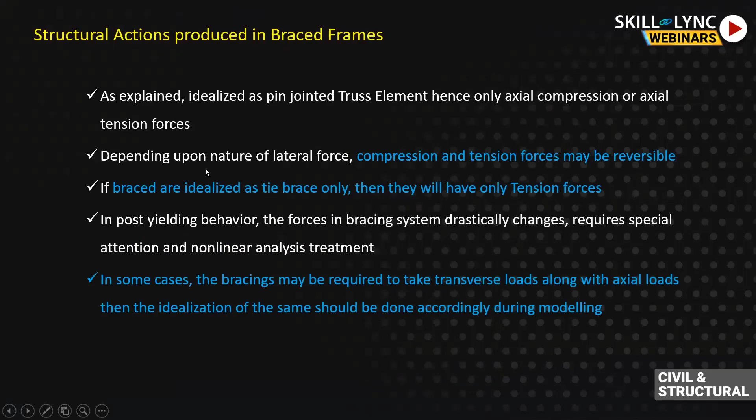Coming to the next part: structural design of bracing members. What is structural design? Once you have the actions in numerical form, based on that you design the system, depending on the nature of the force: tension only, compression only, or both in a reversible pattern. If it is tension only, you design for tension only, if it is modeled and idealized that way and provided practically so that it will take only tension.

Like if you are putting a steel rope as a bracing, then obviously when it is subjected to some compression force, it will not take any force. But once you provide a lateral force, which actually produces the tension effect in that rope, it will be very effective, right?

So when in your model you idealize and practically provide the kind of brace which is tension only, then the design for a tension carrying element should be done. If it is the Indian standard code, you have to do the design based on section 6 of IS 800 2007, which is a limit state design code in the Indian scenario. If it requires to take compression force only, design for a compression carrying element based on section 7 of IS 800 2007.

And if it is required to take both in a reversible pattern, like the scenario we discussed for the earthquake, design first for the compression. This is very important. This single line you will not find anywhere in your academia, but in a practical way, it should be designed first for the compression and then checked for the tension.

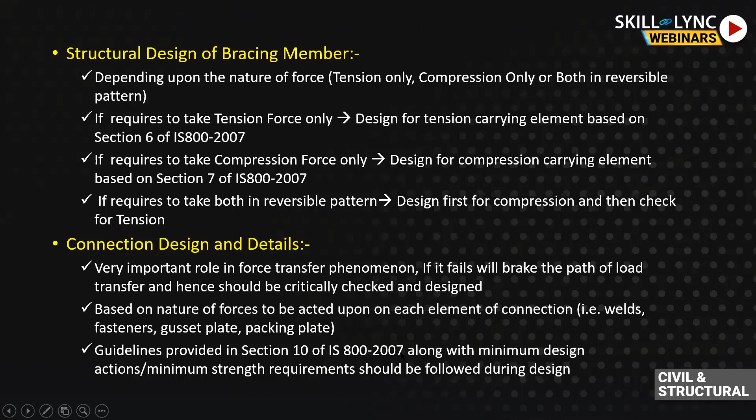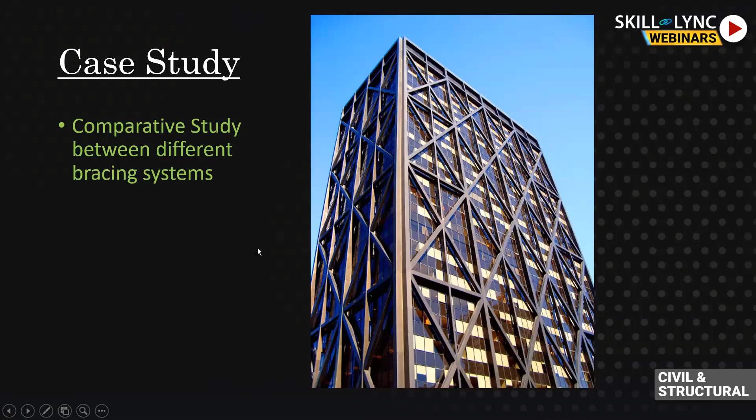Let's quickly go to one small case study: a comparative study between different bracing systems, subjected to the same lateral force and having the same geometrical parameters. Here I put up pictorially 5 different systems. Types 1, 2, 3, and 4 are concentrically braced frames, and type 5 is an eccentrically braced frame. The geometry is kept the same, even the members are kept the same, and it is subjected to the same lateral force at all 3 levels.

The deflection and maximum axial forces have been tabulated here for comparison. Type 1 has a deflection of 13.65 mm and a maximum member axial force of 148.65. Type 2 has 8 mm deflection and 76.59 kilonewton force. Type 3, 9.83 mm deflection, 75 kilonewton force. Type 4, 10.45 mm deflection, and the force is 75.56. Type 5 has a deflection of 26.92. Look at 26.92. And the force is 75.06.

So here you can see that apart from type 1, all the other four types have a maximum axial force within a range of 10% only. So there is not much difference in the axial force. But among 2, 3, 4, 5, the least deflection is 8 mm, as we discussed in the previous slide, that the X type bracing system is very effective in controlling the deflection.

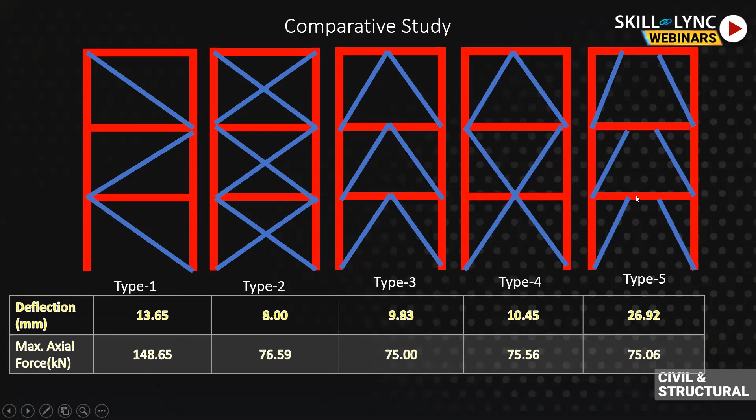Type 5 is eccentrically braced, which is having the force in the range compared to type 1. It's the least force to be resisted by the brace, so it should be lighter in comparison. Here, type 1 and type 5, I will compare. The brace force here is going to be approximately half. You can see here is half of this force, approximately. Right? But still, the deflection here you can see is very much compared to this, almost double: 13.65 here, 26.92 here.

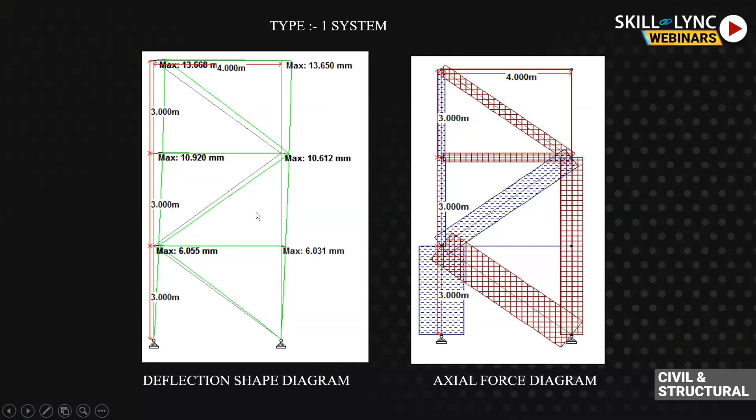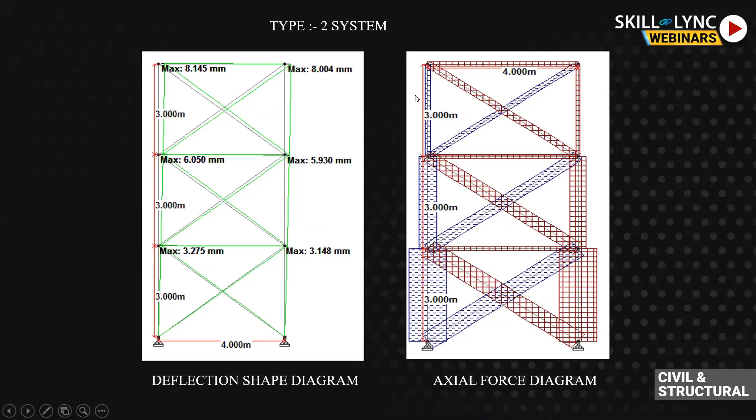Just quickly go through the deflection pattern and axial force for each type of the system. See here, for the first type system, the brown is actually the compression force, and the blue diagram is showing the tension force. The green diagram is deflected and the black one is actual, right? So in the first type and second type, both the bracings are taking the force. One is taking compression and the second is tension. One column is subjected to tension, one is subjected to compression.

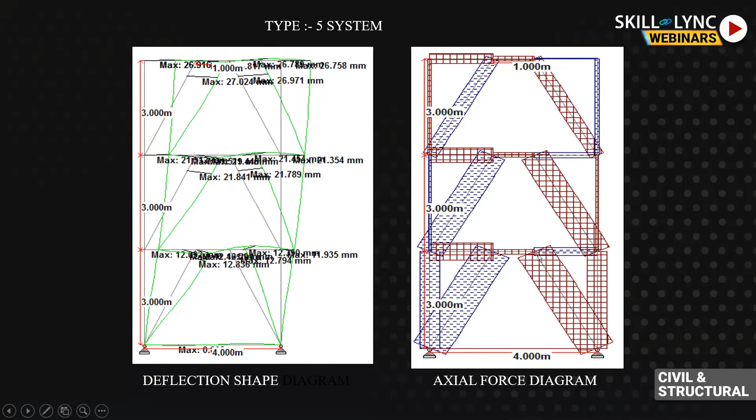Going to the state of the art. Steel structures provide speed and stringent quality control advantages in the construction process compared to RCC, because the fabrication and manufacture of the steel structure can be done in fabrication shops with a controlled environment, so quality control can be obtained. Versatile applications and modifications are also a reason to choose steel structures over concrete structures. You can modify as you need; there is not much headache for the modification.

Earthquake resistant design means designing the bracing system to sustain large lateral forces with maximum use of material strength, hence increasing material utilization with cost optimization. You can even design steel dampers in the form of bracing to control the response of the structure, for a large multi-story high-rise building. The advantage is that once it has yielded, you can simply remove it and place a new brace, so it is very convenient compared to the RCC structure.

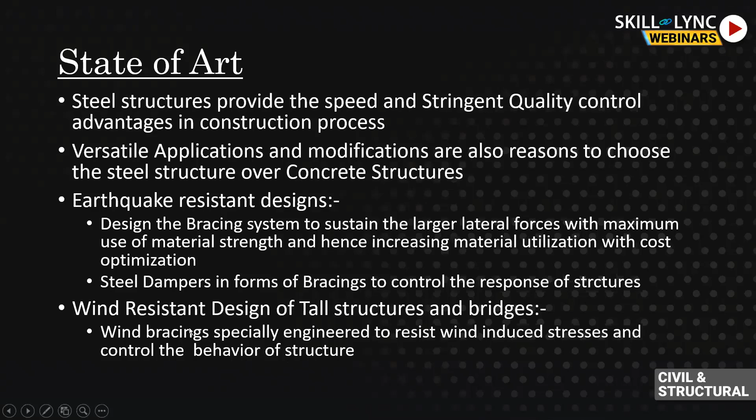What is a recent evolution in the field? There is one called the buckling restrained brace frame system, BRBF systems. Buckling restrained brace frame systems are specifically designed to take very large earthquake forces as a compression member without buckling. If it buckles, your material utilization will be less, right?

If it does not buckle, it will go to the yielding of the members, and yielding requires energy, and that energy is absorbed from the seismic activity. So whatever seismic force is coming to the structure passes that energy to that particular brace frame, the BRBF, right? And the buckling restrained brace will absorb that energy by yielding and not buckling.

So that is the evolution, and it is very much used in American countries. Even the American code has a specific guideline to design buckling restrained brace frame systems, and this is the evolution in the field. So it has been widely accepted in North America and that particular environment.

Then you have a tensegrity structure. What is a tensegrity structure? It is a specifically designed structure where there is a combination of membranes and steel members. For that, the basic fundamental is only the bracings. The bracing is what is taking the lateral force. So in a tensegrity structure, the membrane will take the actions, which is gravity. Against that, the bracing members are taking the lateral forces to give the stability.

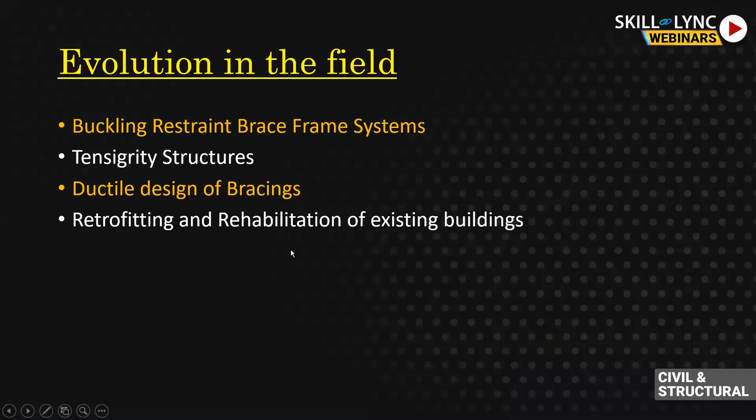Buckling restrained bracing, I am just giving the example. This is the normal local behavior of a brace. If it is not a buckling restrained brace, this is actually happening here. It will buckle out of plane, right? But when you provide buckling restrained bracing, it is not going to do that.

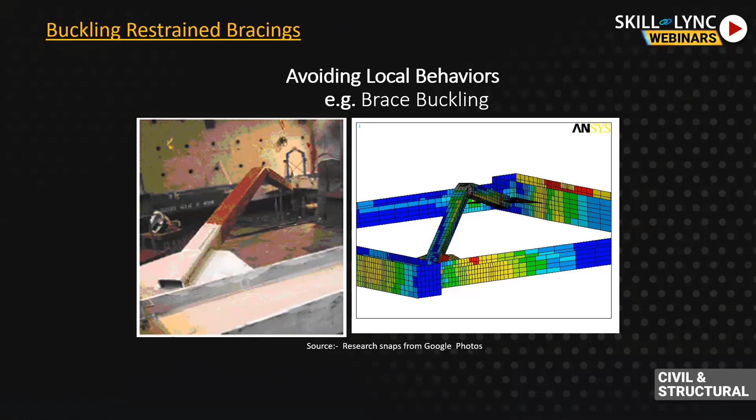Then ductile design, what we have just discussed, by avoiding local behavior of connection elements. Gusset plate yielding will be avoided by doing a proper ductile design, so the connection will be sufficient. Even if this is a buckling restrained brace, if this member first buckles out, then there is no meaning in providing these. So that's the ductile design.

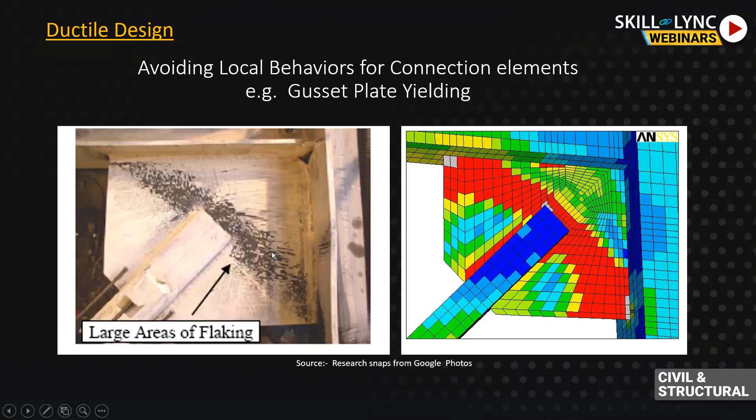Coming to career and job opportunities. Obviously, you can see steel structures are widely used for a wide variety of industries like chemical, textile, thermal energy sectors, oil and gas, refineries, etc. Even offshore structure construction, pre-engineered buildings and industrial structure designs, bridges, stadiums, towers, etc. So for all steel structure design, bracings are required.

The bracings are required for all of the above, and apart from these, they are widely used for retrofitting, re-strengthening and rehabilitation work for several existing concrete and steel structures. So there is wide applicability. There is no limitation on the use of bracing in a steel structure. Braces are even used for retrofitting existing concrete structures, as we have discussed. So there is a wide opportunity out there to make a career in steel structure design.

And apart from that, it is very interesting to know that nowadays there is a scarcity of labor. So with the scarcity of labor and the need for faster construction growing day by day, the use of structural steel will increase and will be preferred more in the construction of residential and commercial buildings in the coming years, right? Right now it is used mostly in industrial or special structures.